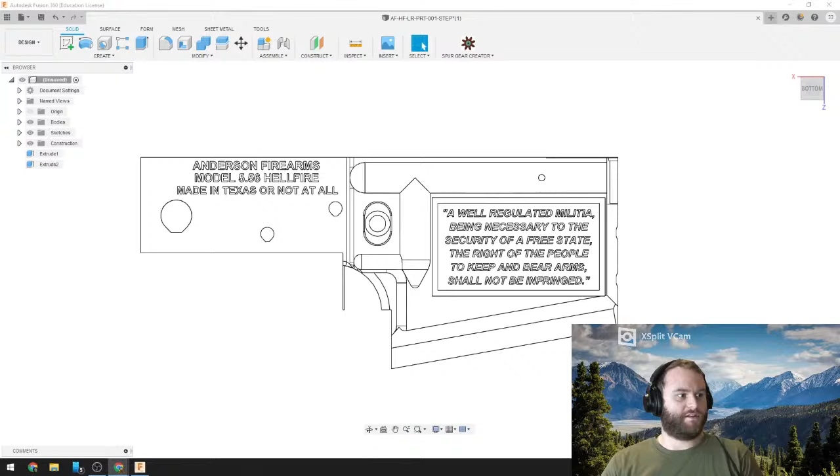Hopefully you can hear me now. Like I said before, or just said, this is my first time doing this. Thank you very much. Thank you.

A few people have been asking me how I edited the text on a certain 3D printing project that I did a little bit ago. And so, we're going to learn how to do that right now, all of us together. This is just an object that I found online. So we're going to figure out how to get rid of this text. There's a couple different ways to do it. So we're going to kind of go through what you would do for this model.

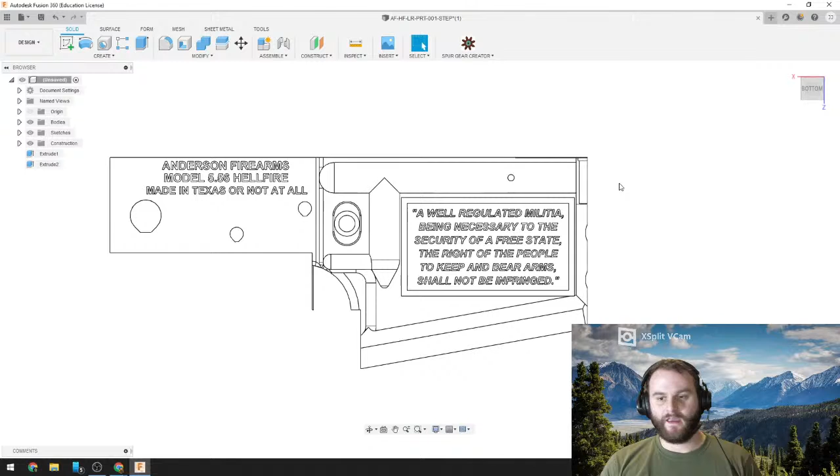We've got it loaded up into Fusion 360. It came up automatically in inches. That's totally fine. So this right here, I don't know about you, but I hate it. We got a few different options. We can see that this is raised up. The letterings are raised down. So, one thing that we could do is we can come in here, we could raise each lettering up, then we can raise this down. I think that's a waste of time.

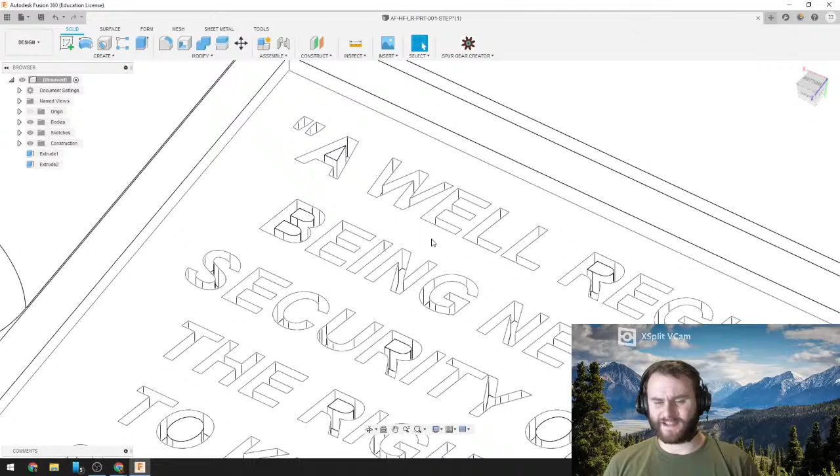We're going to make a box around everything. This raised bit, we're going to crank it all the way down to just delete everything and then raise it back up. So how are we going to do that? Well, it's honestly not that hard. We've got this outline right here. First, we kind of want to see how far we want to go down.

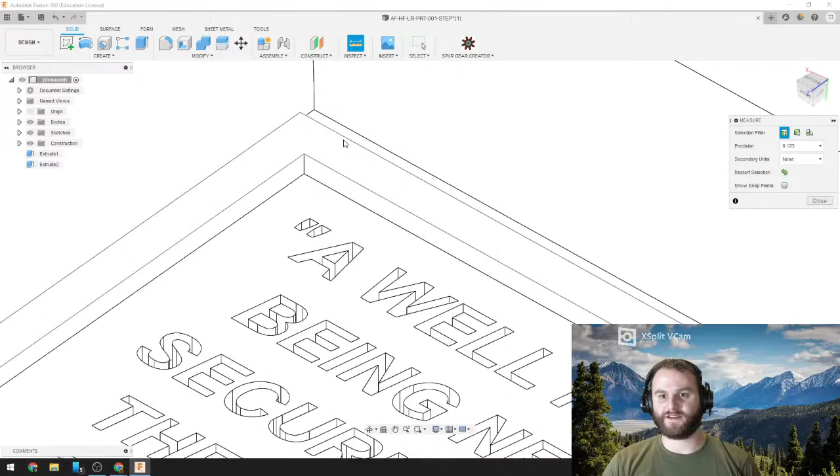So I can use this inspect tool and I can see how long this line is, 0.038. And I can see how long this line is, 0.05. So our square is 0.038. Our text is 0.05 inches deep. We want to remember that because some guy named Anderson or Potato Society or something decided on that and it was very important. So we want to respect that and we want to keep it.

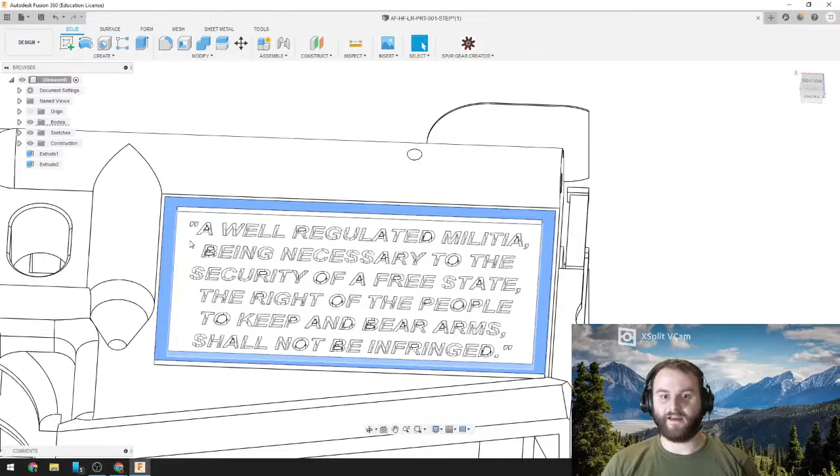So what we want to do is we want to select this thing right here, this whole outside, because this is the plane on which we're going to start our extrusion. Once we've selected that, we want to select create a sketch. And we're going to create a sketch on this plane. Now, we're upside down, that's totally fine. We can come up here and we get our square tool, make a square over everything, and finish that sketch.

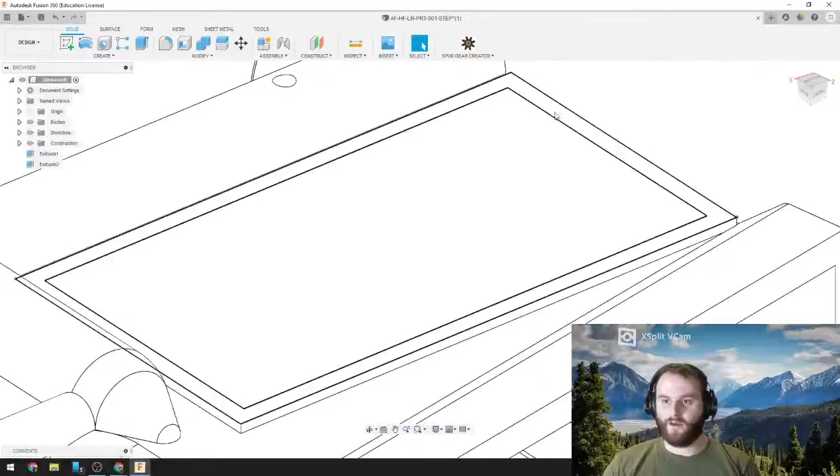So now we can hit this outside, and it's kind of trying to be smart and be like, hey, do you really want this inside portion too? Well, yes. So we can hold shift, we can do that inside portion too. And now we want to extrude everything down, and that's going to erase that text that we don't want. So we can hit extrude. It's going to ask us what direction. We want to go negative, right? So the cool thing about Fusion is we can go negative

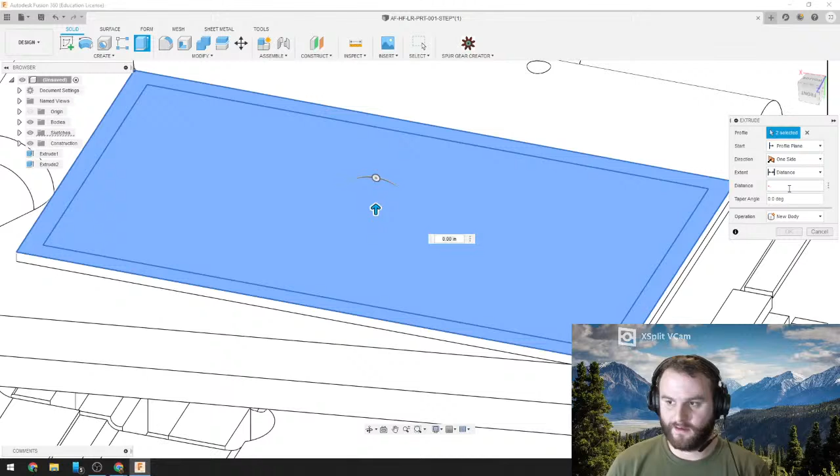0.038. And what we can do is we can add to that. We want to subtract our 0.05. And that's going to take all the way down that ledge, all the way down to the text. We want to make sure we're at cut, and we can hit OK. And then bada bing, bada boom, our text is gone. We have this big square, but this is the easiest thing to get rid of.

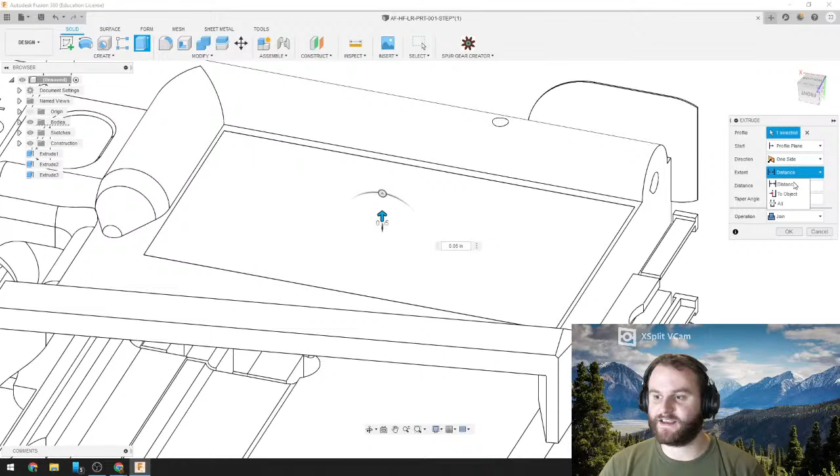We can click inside this square. We want to extrude, and this time we're going to extrude up. We got two options. We can either go distance 0.05, because remember, that's how far down we cut. Or another thing we can do is we can change this extent distance. We can change that to object, and we can click what we want it in line with. We can click it in line with that. It's going to raise it way up. We want it in line with this plane right here. Hit OK. And then we've gotten rid of the text.

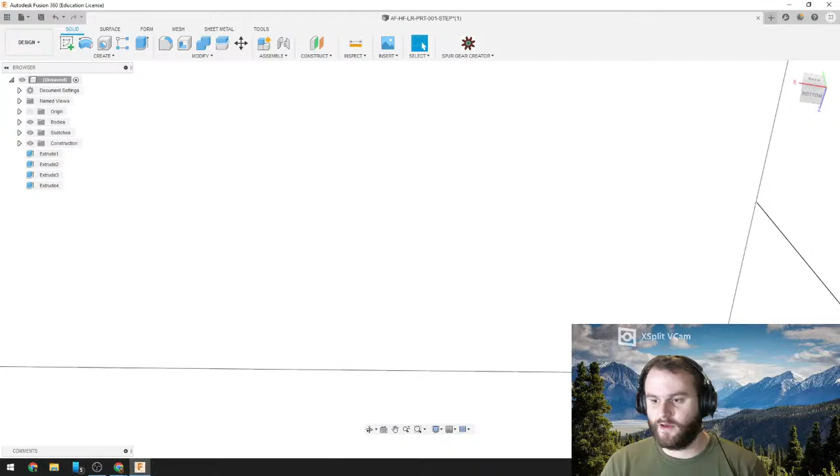It's completely plain. Some downsides to doing this method are we have a little nick right here. If we really wanted to, we could fix that. I don't care, so we're not going to do anything like that at all. The other method some people might do is they might come in here and click in here and hold shift and do a couple, and then they'll extrude it up to the object. That can be done too, but it's tedious.

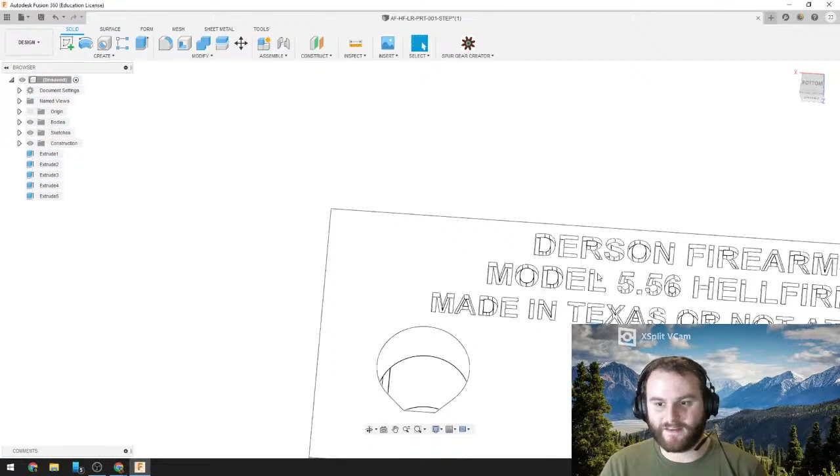It's boring. Who wants to do that? Is any of this making sense? If anything's not making sense, please let me know in the chat. We'll go back, we'll look at it. That's totally fine. But the next thing we want to talk about is how do we add our own text?

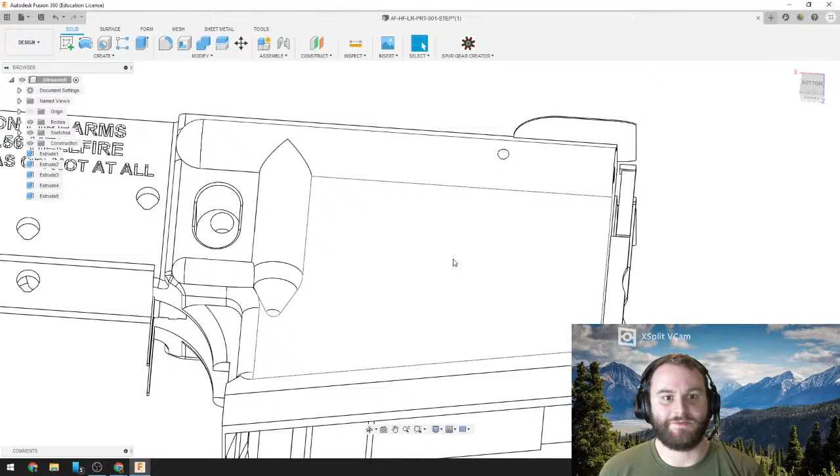Well, let's say we want this to be, let's throw the name cheap shot in here, right? So we can click this surface. Once again, this is the surface that we want to do everything on. We'll see about that. We're going to get through this first. So we want to go here. We want to create a sketch.

How did I get these black and white lines? So this is a personal preference. Let me close out of this sketch real quick. I don't know why these buttons aren't working. But you can click this button right down here, and you can change the preference, whether you want to view it shaded, or whether you want to view it as a wireframe or something like this. So this is just how I prefer to view my things.

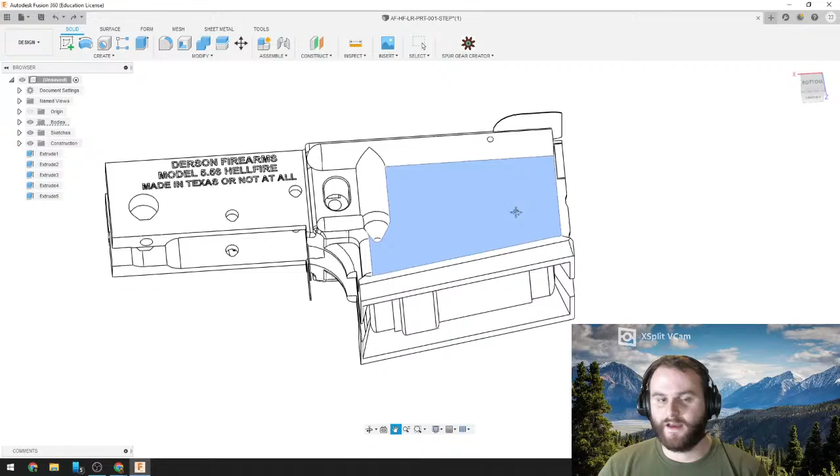So we want to hit this plane. This is where we're creating our sketch from. If you don't like working upside down, we can flip it around. That's totally fine. And we want to make it say cheap shot. So we're going to go create, text, easy peasy lemon squeezy. Where do we want the text? We want it right here.

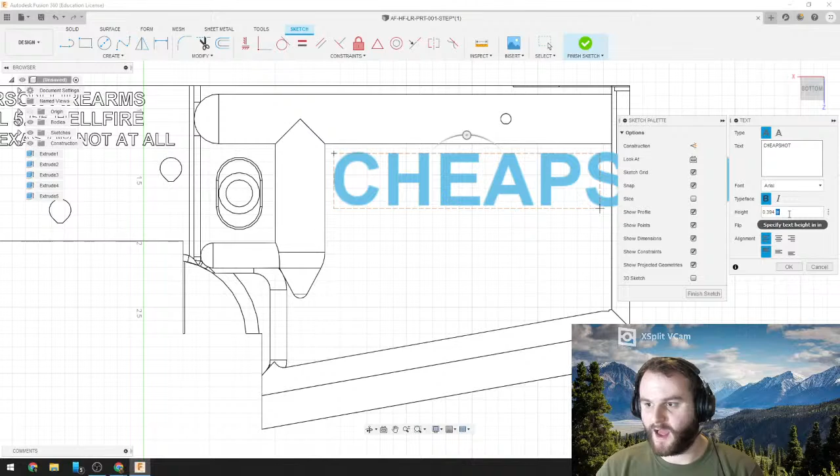Cheap shot. We can make it bold. We can change the font. We can do all that stuff. But I'm perfectly fine with what we're doing. So let's make it 1/5 of an inch. And we can slide it around and whatnot right there. So cool, we got the cheap shot.

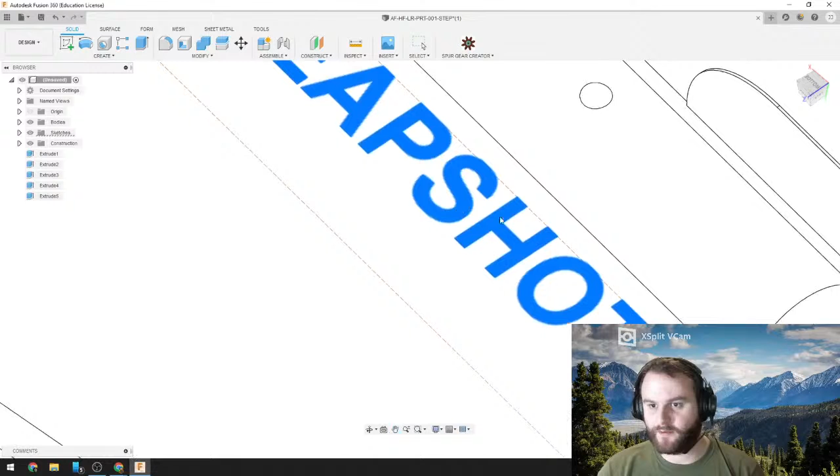And we want to extrude that down. It's super simple. We can just click on our cheap shot logo. We can extrude it down. And we want to go -0.05. Boom, we've got our own text in there. Now if you want to do it on that side, if you want to change your selection, make it say something funny, that's totally fine. That's what you can do.

Now another thing is let's add a picture. This is the fun part, right? We want to make this stuff our own. What picture are we going to do? Let's give it an eagle. So we want it to be nice and high resolution, and that's mostly because we're going to convert it to a file that Fusion 360 can work with easily. I did an eagle earlier, so I'm just going to keep using that one. Or you can use a vector, that's fine.

But once you find one that you like, you want to right click on it, save it wherever you want. And then you want to use a converter. So this is a JPEG to SVG converter. This is what I use for everything. We want to choose our file, and I'm going to use the one that I downloaded earlier. Oh, of course, it's not easily accessible. Sorry, I just got to find where I saved the other one. Whatever. We'll use that one. And it's going to convert it to SVG, start our conversion. And then we'll download it. I won't download it because I want to use my old one.

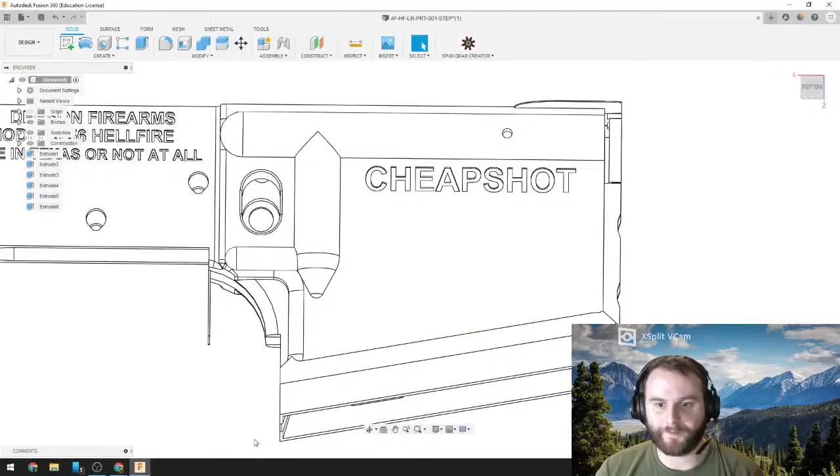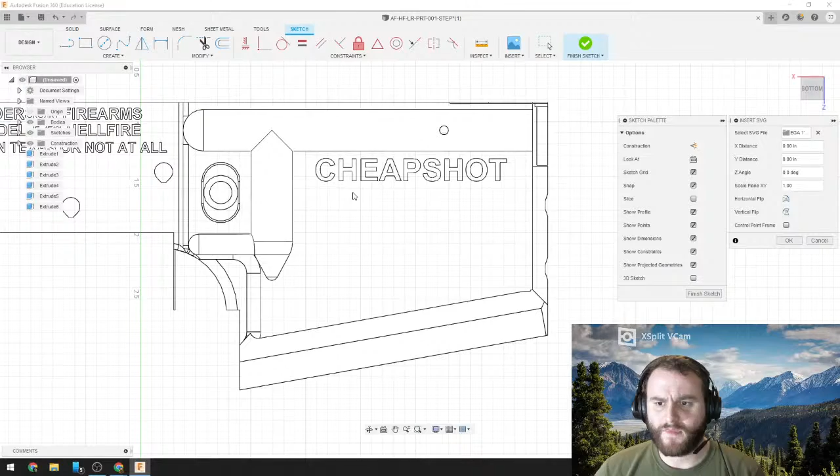So how do we put that into our print? Well, we want to click the same surface that we want to work on. Are you noticing a trend? We want to create a sketch. Let's just flip it around so we can see it a little bit better. And we want to insert an SVG. This is where we can put that SVG that we just downloaded. So you click on it, you can't find it, zoom out a little bit, she's over here, right?

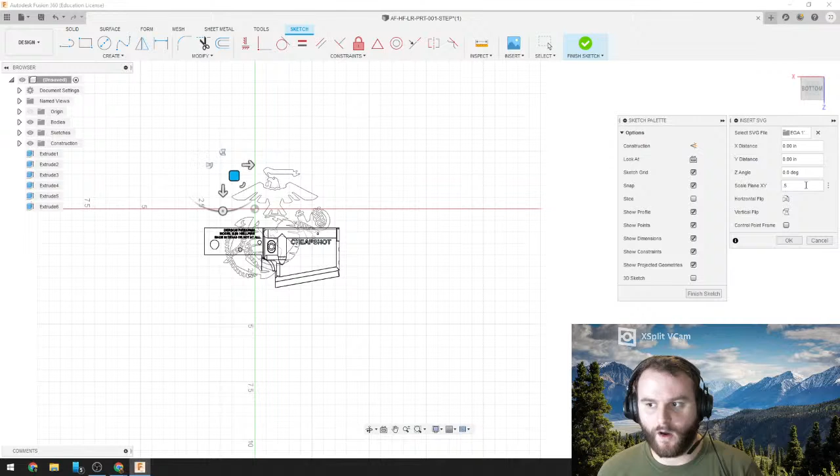We can zoom it around, flip it around. We want to scale it a little bit, it's too big, so I can come over here, I can scale, let's say 0.5. One thing to remember is if I type in 0.5 and then I move it, it technically goes back to 1. So if I want to move it again and cut it in half again, I've got to do 0.5 again.

So zooming in, we'll just move it and get it a little smaller. Keep in mind I moved it, I can't do 0.5 again or it's going to get super small. So if I did that, we'd get super small, so I want to go something like 0.9. You know what? That works.

So if I like that positioning, I can finish my sketch. It's going to take a little bit for Fusion. Sometimes these lines kind of make it complicated. And then we can come in and we got that image right there, nice and perfect.

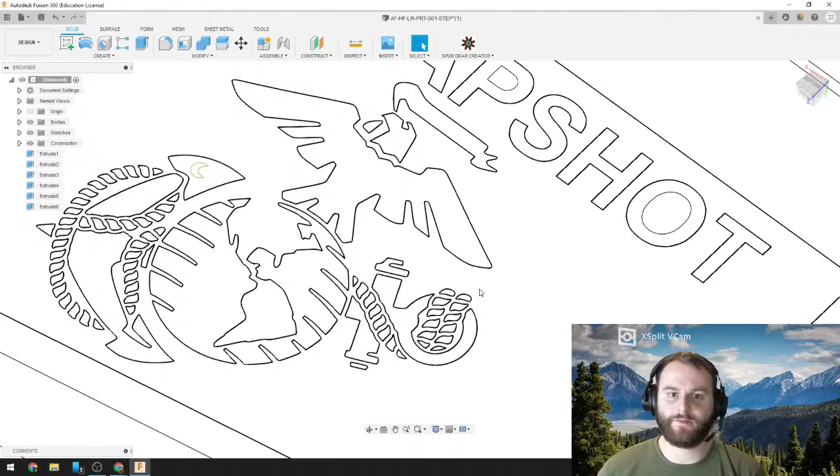So we want to inlay that in. We can either put it out or inlay it in. Inlay it in is the preferred method. So just like we did everything else, we're going to hit extrude and we're just going to click in the center of all these different things that we want to extrude in.

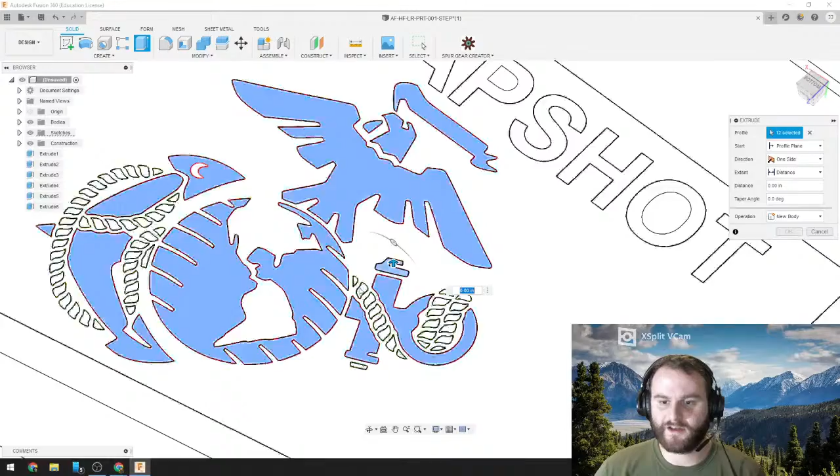Now this is going to take me quite a while. I should have done something a little bit quicker. We'll do everything but the rope. I think y'all know what this looks like.

One thing to notice is this will be fine with the rope, but if you're doing things with lots of fine detail, you're gonna have issues with that fine detail coming out when you actually print it. So just keep that in mind when you're looking for an image. You want a high resolution, and you want to make sure that you're not going too deep in the details.

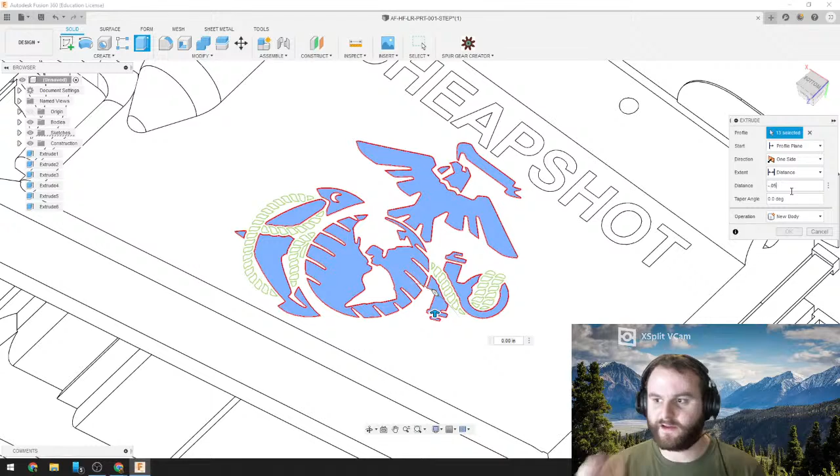Distance, what are we going to do? You guessed it, negative 0.05. And then we hit OK. Fusion might take a second, lots of complex geometry, and then boom, we're done. We got our own image in line with the item.

It's not anything more complicated than that, and then you can do whatever you want with it. This will work with any type of file that you have, as long as you can bring it into Fusion 360 and it's a part file or a step file. It'll be easy peasy lemon squeezy.

Are there other ways to do this? Yes, there are other ways to do this. You could actually look through the progression of how whoever made your file actually made it, and you can step back or suppress certain features. That doesn't always work because that may not be provided for you, but this way will work. So easy peasy lemon squeezy.

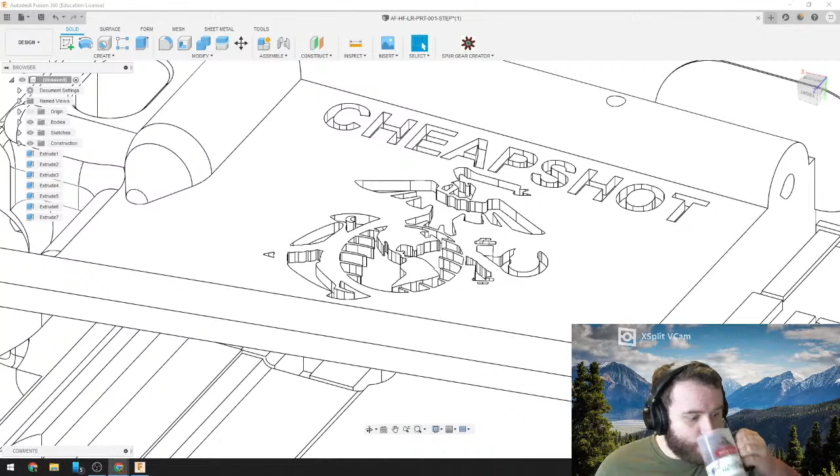All right, what else do you guys want to know how to do? Just simple things with Fusion. Let me know in the stream chat.

What is this? Could you do the FGC 9 lower with the J Stark watermark so I can see everything from the beginning? I want to be careful with the files that I use, just because of YouTube. So I don't think I'll do that exactly, but it's the same process, you know, just get that SVG, insert it, extrude it down. It's no different, no matter what you're doing. Even if you were to just make a random part right now by yourself, it would be the same exact process. So if anyone else has anything with Fusion, I'd be more than happy to answer that.

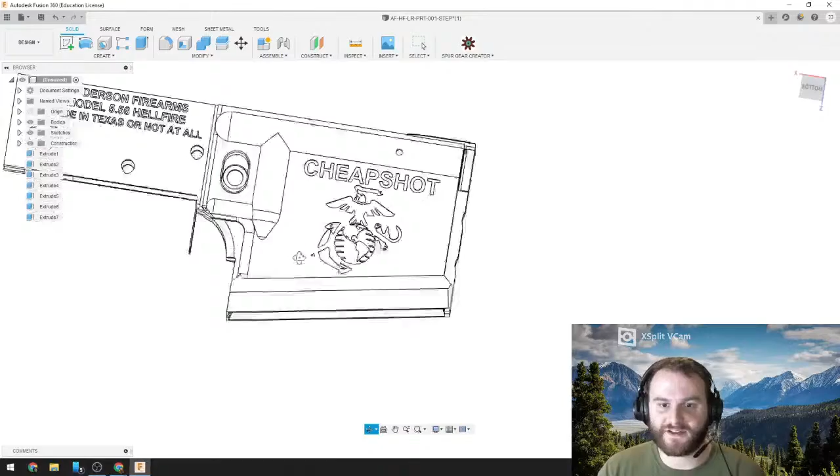One thing that I did is I used some squares to kind of extrude out just to make this a little bit different. So let's see what else we can do.

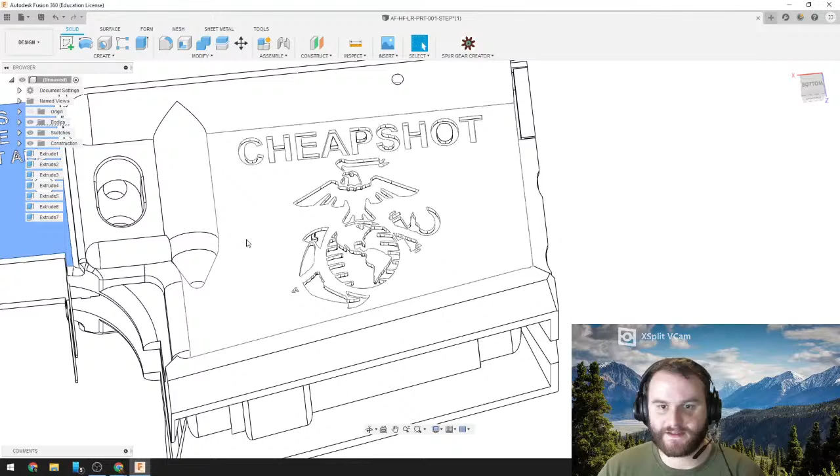Let's say like this edge right here, right? You don't like that it's sharp. This is a top edge, so you don't want to use a fillet because 3D printers will have a hard time getting that rounded surface on the top of your print. Remember, this print's like this. So if you kind of want it a little bit less sharp, you could use a chamfer. You can just click on that line, and then you could bring it down and kind of make it a slant. It's not going to work because of other reasons.

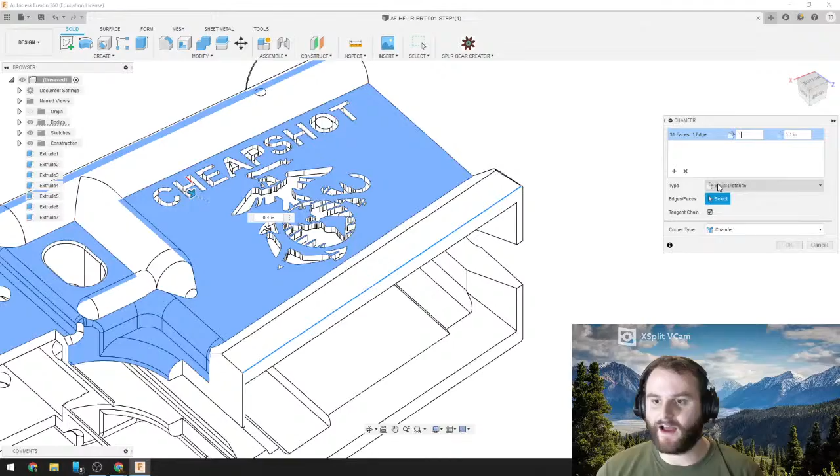What about this token on the other side? I don't know about you, I really don't like... I'm very new to Fusion, but I know Blender a bit. How do I select individual letters? Just select them, man. Just select them just like this, just in there. Extrude it, pull it out, right? Distance to object. That slice. And she's gone.

So let's see how to get rid of this token. I personally don't like the whole token thing, but I didn't design it, so I don't have too much room to talk. You can do a circle.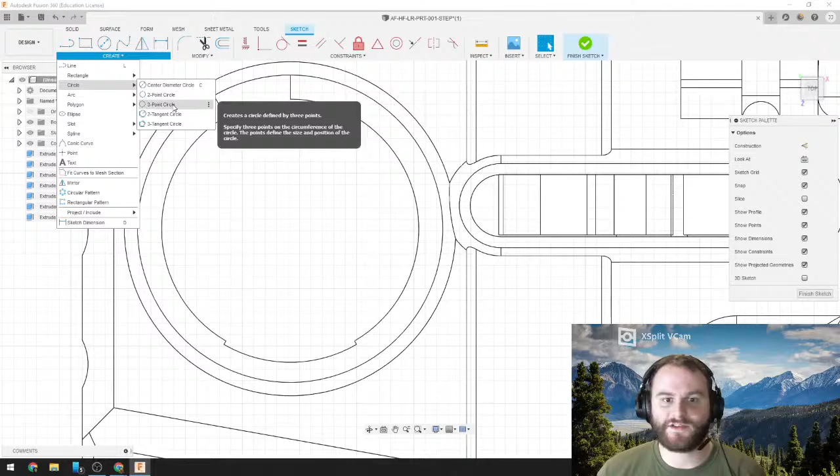We'll just do a 3-point circle. It won't lock onto this, but you can do a 3-point circle right above it on top. We can come down and just do it pretty close. Then it's going to ask us how we want our third point. We just want it right out there. That makes a circle around it.

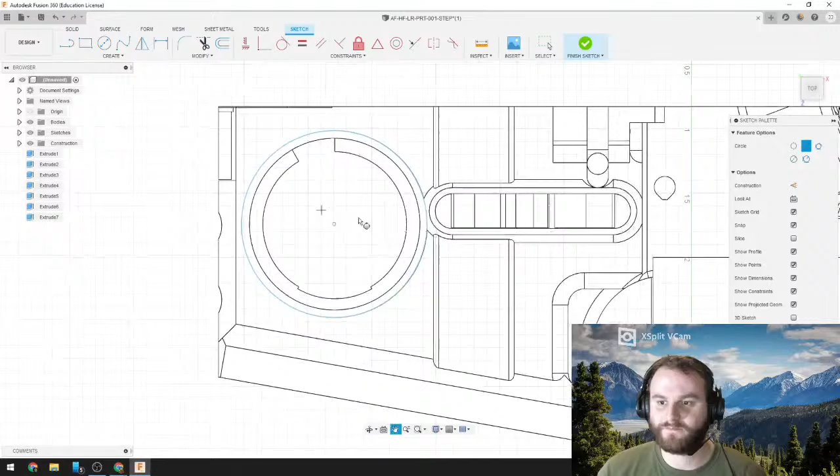We can finish our sketch. Just like before, we can click in the middle, hold Shift, to get everything. We're going to extrude it down to object, this plane right here. Hit OK. And we've cut the token away.

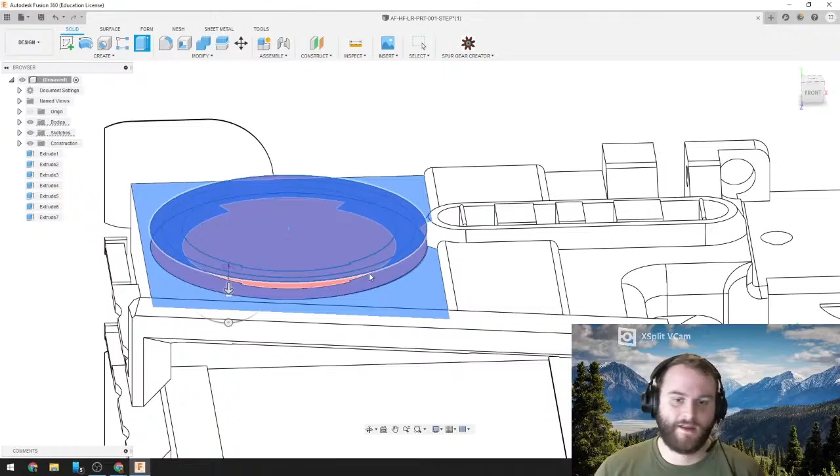Well, for the most part, it looks like it's inlaid a little bit. No problem, because I can click inside and extrude it up. Done. There's this little line right here. That must have just been an issue with my 3-point circle. Wasn't the best way of doing that.

So I can click that, extrude it. Oh, just make the circle better. You can get that. Fixing that, I don't really care about it. It's not worth it.

Mine does not do that, it just selects the whole blob of stuff. Maybe it's because I put the STL file into Fusion. Yes, it's because you put the STL file into Fusion. Use the step file, right?

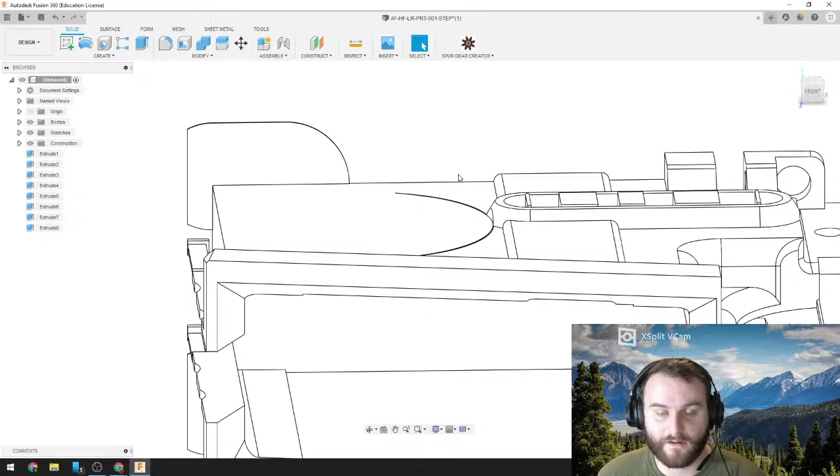So what is she asking about? Well, if I come over here and I want to open a file, I come to where I got all this stuff loaded. Let's say I'm doing the Anderson Hellfire. If I do the STL, it's gonna come out looking like this.

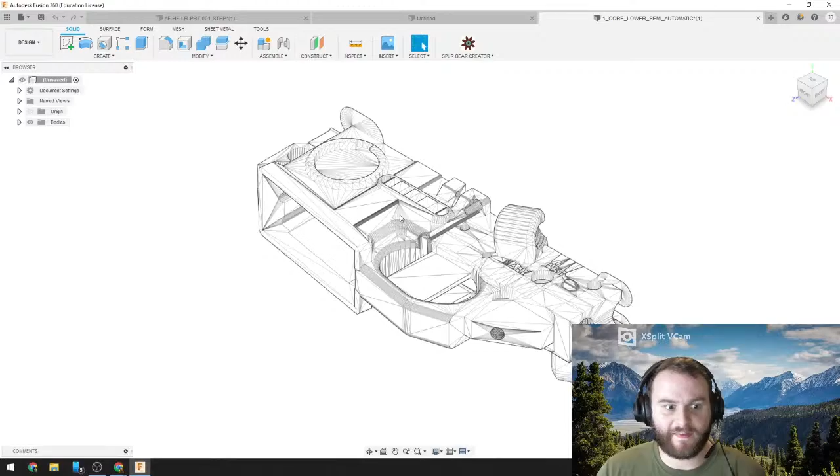Jesse, is this what it looks like? I'm sure this is what it means to look like. You don't want this. We want to use the part files, or I'm sorry, not the part files, we want to use the step files. So not STL, step files. What else has anyone got?

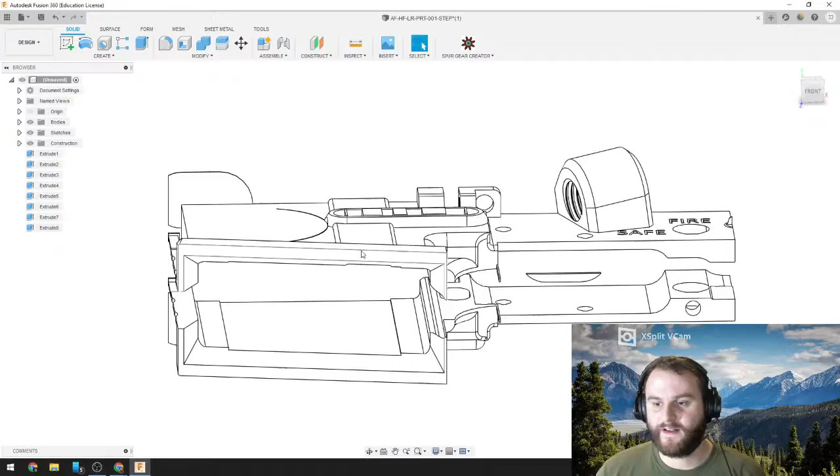Let's take this and let's pretend, yep, that's what it looks like. So Jesse, you want to make sure you do the step file. Let's take this and actually load it into a slicer to see what it looks like. So we're gonna hit save that as an STL, and we'll save it up here, and we'll call it a stream.

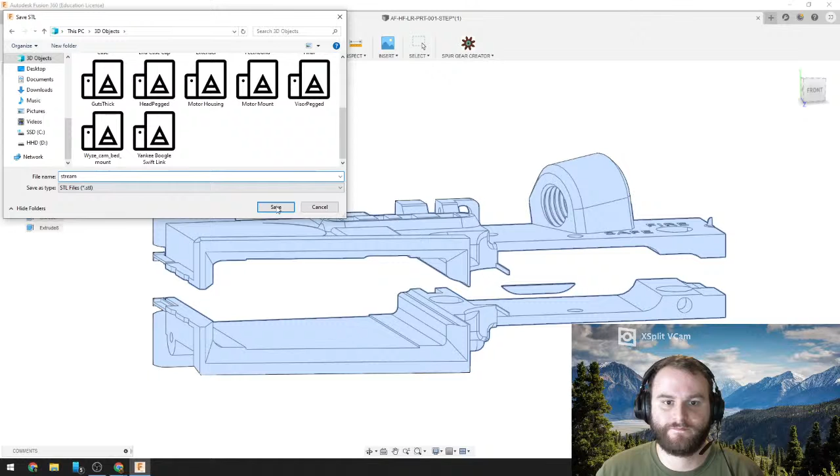We'll open up Cura and take a look at this. So we've got Cura right here. You should have your slicer profiles all set up. We're going to click on this. What did we name it? We named it Stream, didn't we?

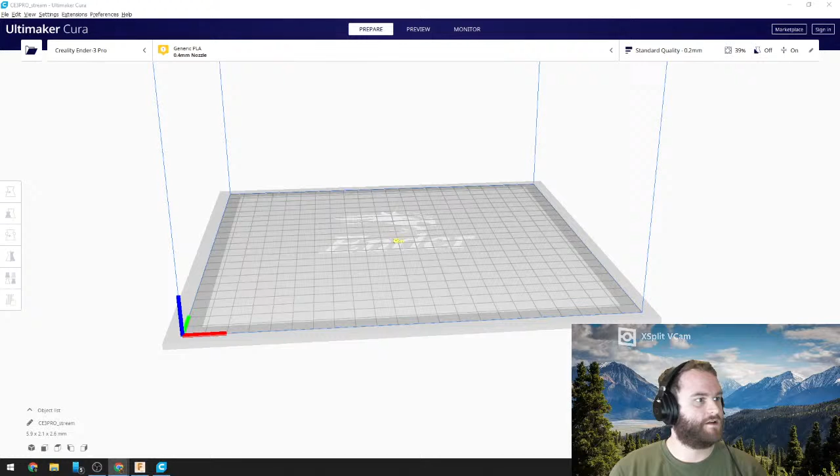Oh no, it's so tiny. And that is because it's in inches and Cura loaded it in millimeters. So I don't remember what, 254 I think. We're going to click on this and we want to scale it. I think 2540. There we go. And there we go. Now we put it from inches to millimeters.

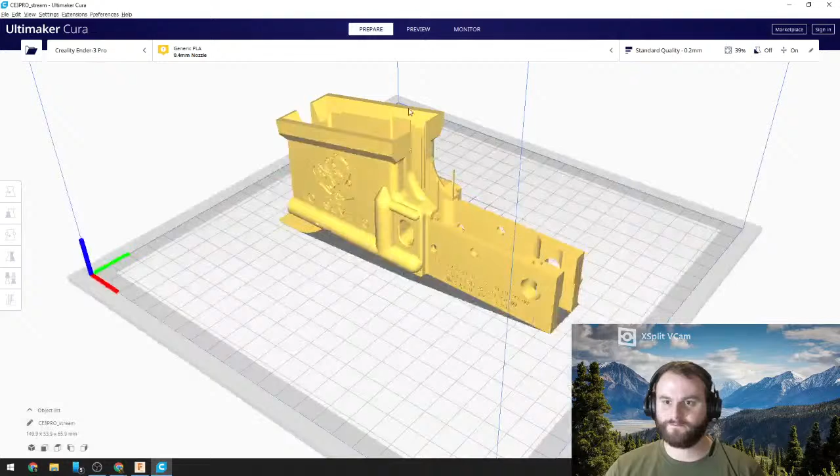So one thing to remember is we get our strength from layer lines, not from infill. So you still want to have a good amount of infill on this, just because you want it to have a little bit of mass, but you also want to have good layer lines.

I believe it says something like 5 wall count, 4 wall count. When I printed this, I did 5 walls, 5 top layers, 5 bottom layers. I think I did 90 to 95% infill. I don't ever do 100% infill, I just hate it. I think you're gonna mess up too much. You might have an issue. Like I said, 90, 95 will do it for you.

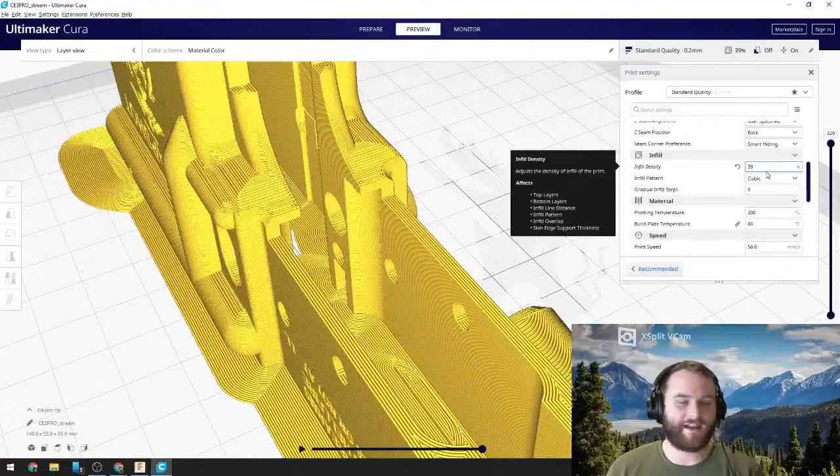But one thing you want to check is you want to look down your print and look at these walls. This isn't, you don't need to worry about this. But if you come up where, let's say, this is a good wall section, that is going to be a long, continuous wall that needs strength, right? So if we have a gap between these two...

Number one, it's gonna be weaker. We have a gap between those two walls to compress. But then number two, it's gonna spend so much time doing those wall layers and then coming back and filling in the little infill bits. We don't want to do that. So I'll show you what I mean. If I put my wall count to 1, it's not gonna be enough for that area.

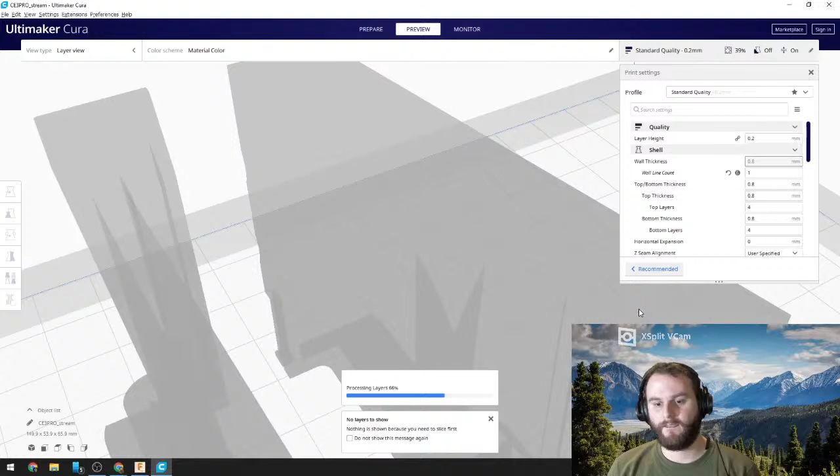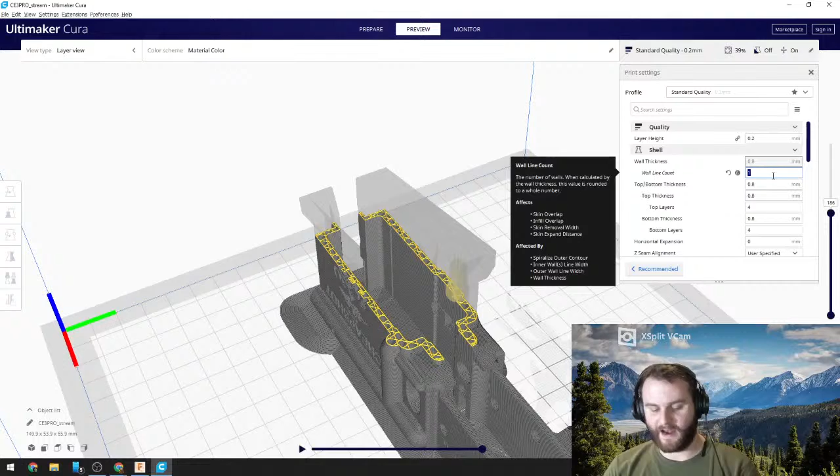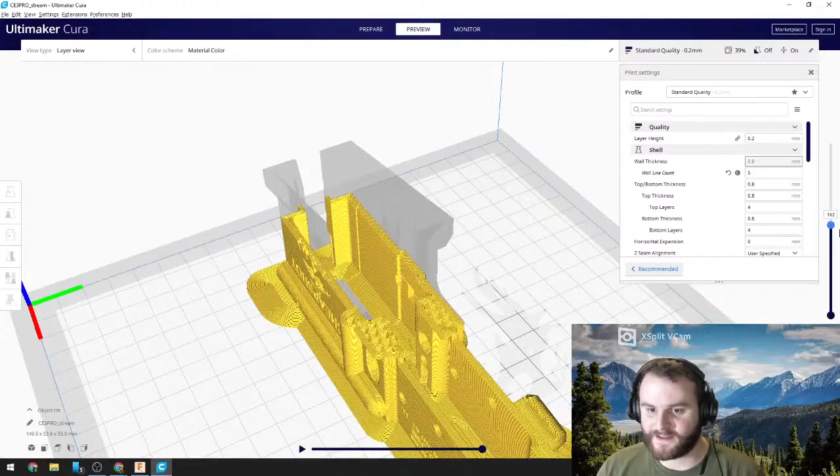All right, it adds 2 hours. But I tell you what, because you got other spots down here where it's doing all that infill down there and whatnot. But just make sure your walls look good. Take the time to come in here and inspect how it's going to be going, all right? Remember, your strength comes from your walls, not from your infill, right? This one did great for me with no support or no adhesion type.

Get yourself a deburring tool. That's great for just running down prints, just kind of cleaning it up a little bit.

Wouldn't a lower percentage be less strong? Sorry, I didn't see that. Like I said, your strength comes from your walls, not from your infill. Still do like a 90 for this, you know, just in case, just for a little bit of mass, but the majority of your strength comes from those walls, not the infill.

So, any other questions, throw it in the chat. And, you know, you want me to make a part, you want me to do something else with this, do a different image, show it all again, let me know. So we'll kind of chill for a few minutes and see what you guys think.

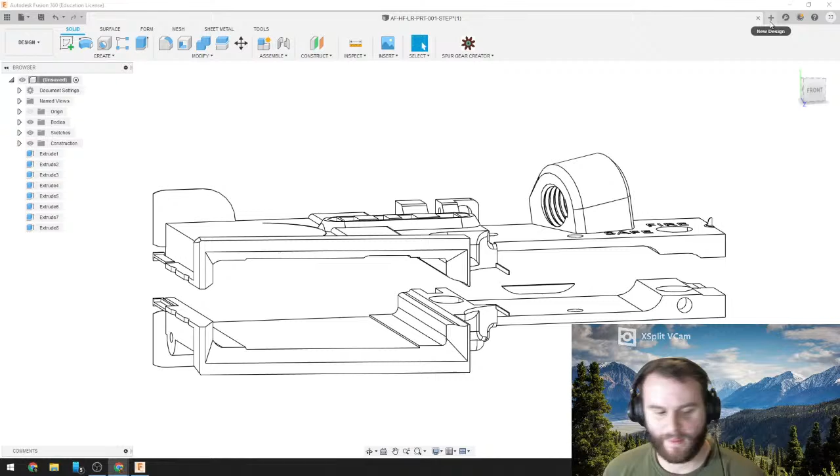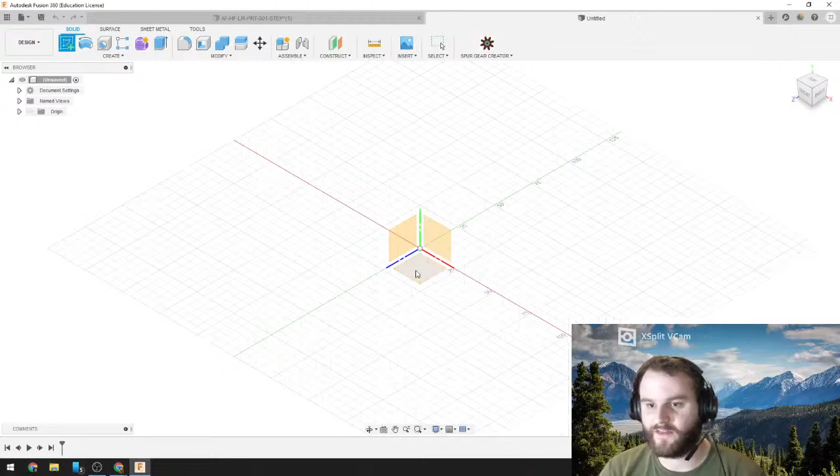I don't know, what should we make? What do I got around me? I don't know, let's just make something. Let's make a calculator, right? So if we're starting off with nothing, right? And we want to click on sketch, and then we got a few different things we can make. We have these 3 planes and then these 3 axes, right?

Oh, I know. So I just made this little motor mount, right? And you know, it's because I'm going to make my own 3D printed tumbler. So this is kind of fun. This is going to be the next video. We'll show you how I made this motor mount.

So I want to work on this plane right here. Why? Who knows? This is a center point. Let's try and keep using the center point because it is going to have an axis running through it, which we're going to use later, especially if we're going to be making these circular parts. So this is just like before where I was working on that layer of the part, except now I'm working on a plane. I don't have anything to work with, so we're going to make it.

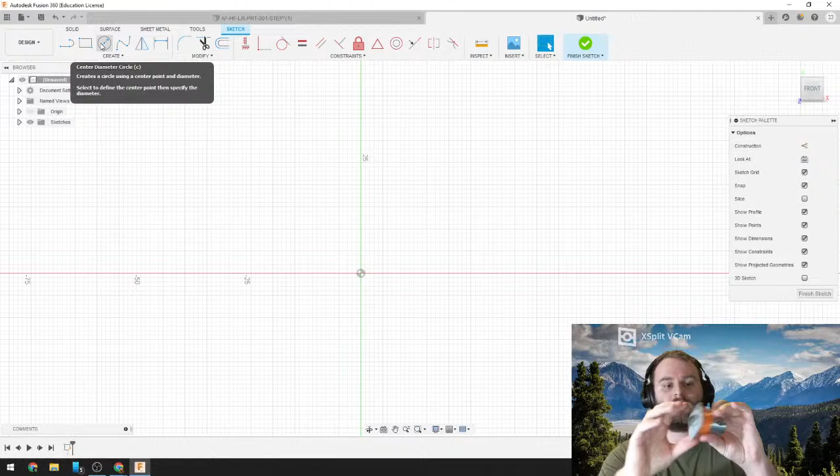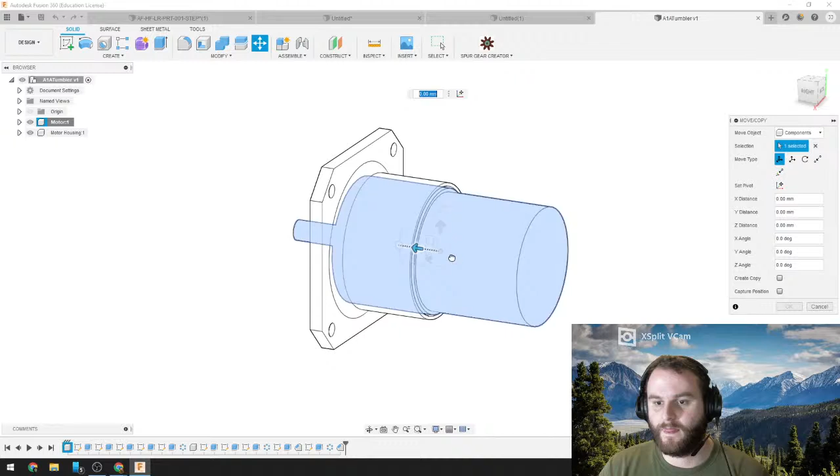So what's the first thing for this motor mount? Well, I kind of got this part coming out, you know, so I actually will open the one that I made just so we can see. So here's the one that I actually made. We have a motor and the motor mount, right? So the first thing that I wanted to do with this is I wanted to make the motor. So I guess we'll do that. I guess we'll make the motor.

And I'm going to take and I'm going to measure the motor, and it's going to be 50 millimeters wide, 50 millimeters in diameter. And I'm going to hit my sketch, and I just got this circle just floating into space, and I need to make it a cylinder. So I want to click on it, and I want to extrude it out. Just, you know, think of any shape.

You know, I remember when I was younger, we were in the Cub Scouts, and we had a bar of soap, and you had to whittle it into something. And I was going to whittle it into a bear. And I asked my dad, how do I turn this bar of soap into a bear? And he said, well, it's easy. Just take the bar of soap and cut away anything that doesn't look like a bear. And I thought he was a jerk. But you know what? He was right. This is just the same thing in reverse.

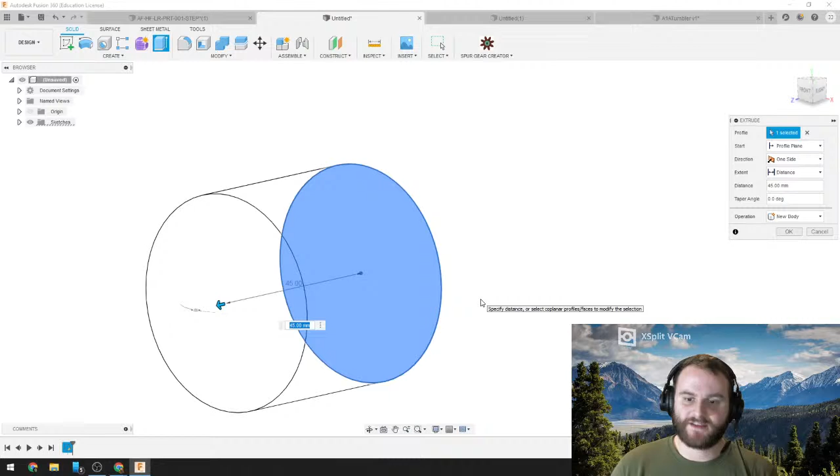So let's say it's 45 millimeters out, 50 millimeters wide. This is our motor, right? We come in here in the center. We still got that spindle. Let's say we give it a spindle that's going to be 10 millimeters. And we'll extrude it out 10. We're just kind of throwing things out here, just kind of seeing how it does.

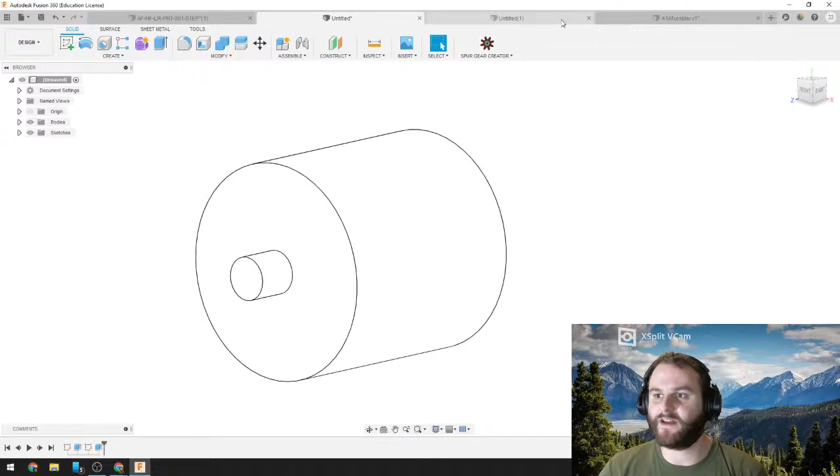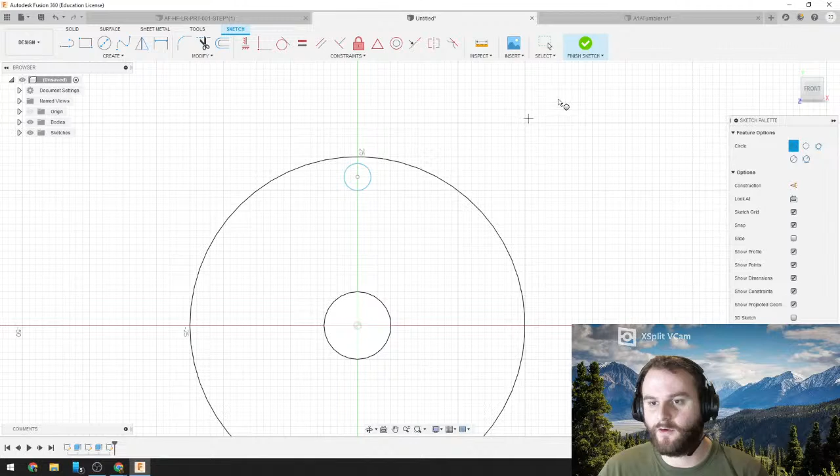If we look at this, you see that I have holes for where it threads in, and that came with the motor. So how do we make those holes? It's great. We're going to go on the surface. We're going to put our holes. We'll measure it. Well, we want to use this circle, 2-point circle. Let's say those are our holes. Hit OK. Those are 16 millimeters deep.

But how do we get them around? Do we go and we do those circles all the way around? That's kind of tedious. One thing that we can do is we can do what's called a revolve feature around an axis. So we want to come down here to create, and we have all these different things. We've just been using the sketch and extrude, but we have all these different things. And I really like that it kind of shows you what it does. But we want to come over here to the pattern tool, and we want to do a circular pattern, right?

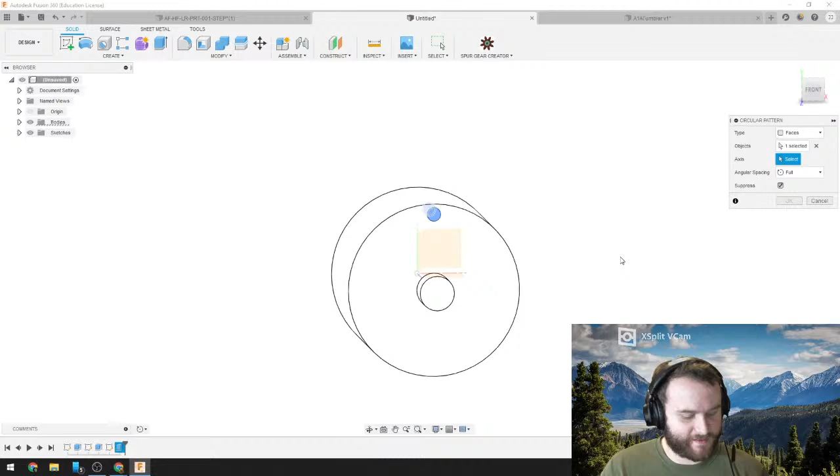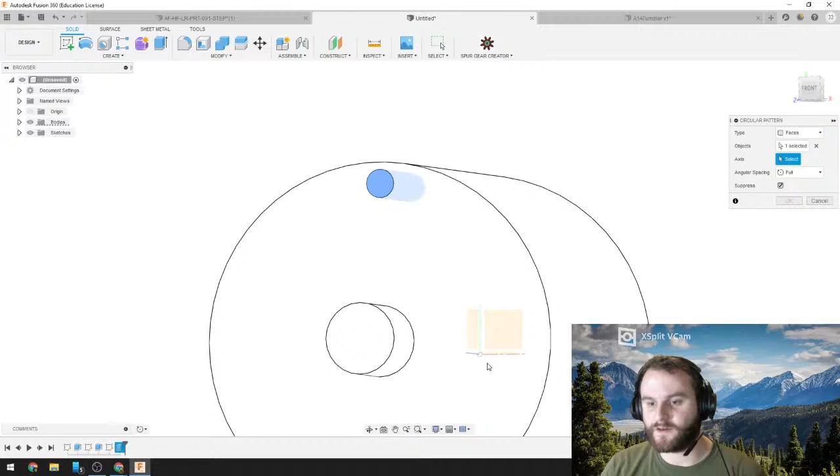So it popped open. What object do we want to do? We got to select that. So we can select the hole down here. I just like selecting down here, that extrusion that I did. And then we need the axis. So we need to select that, and we need to tell it where around do we want to do our circle. Well, we want to do it around this center point right there. This center point also just happens to be the center point of this circle, so we can click this circle, or we can click that axis. Totally fine. If you click the circle, it's going to do the center point of the circle. But we'll click the axis. I'm sorry, I keep saying axis.

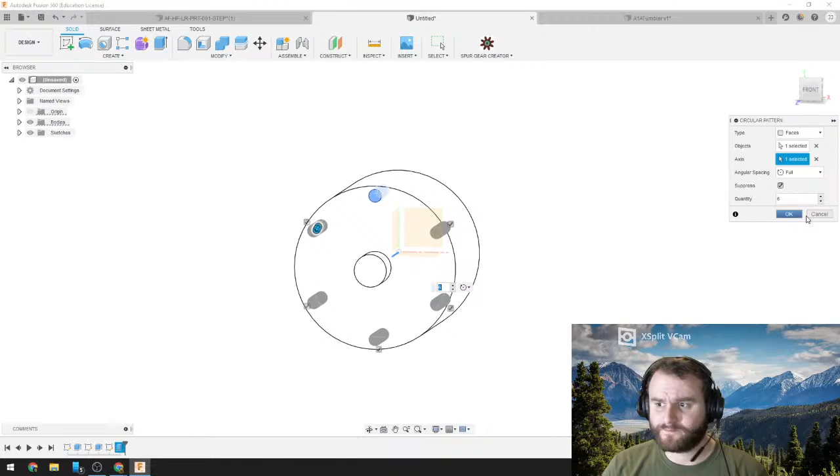Axis. We got 3. We can kind of change how many we want. If we want 1,000,000, if we want a lot, whether or not we want them equal distance, whether or not we want them a certain angle. We'll say that we want 6 of them. We hit OK. Boom. We got them. 6 equal circles around that axis, which is exactly what we needed for our holes. It was perfectly fine. So that's a pretty cool one.

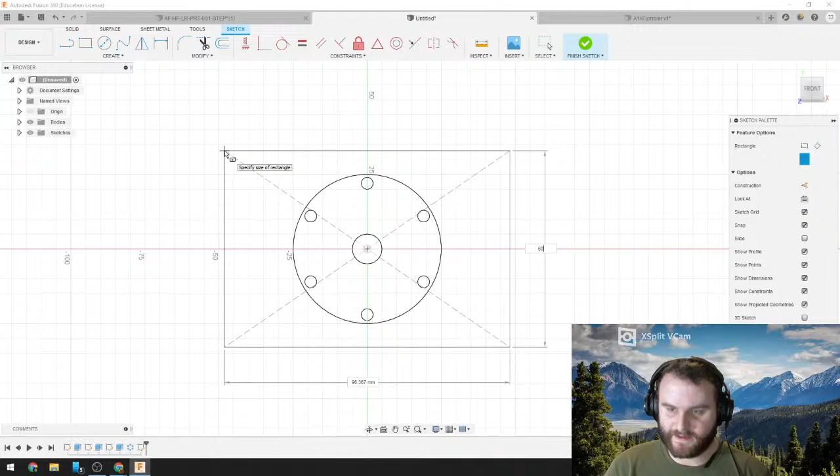You could also do things where, so when I had made these holes right here, I didn't make a new part, but that's fine. So let's say I click on this face, and let's say I have like a mounting bracket with it, right? Let's say this is 60, this is 60. Finish that. Let's just say this mounting bracket was already attached to it. One thing that you can do is I can come up here, I can create a sketch, and I want some bigger holes up in the corner, right? Some main mounting ones.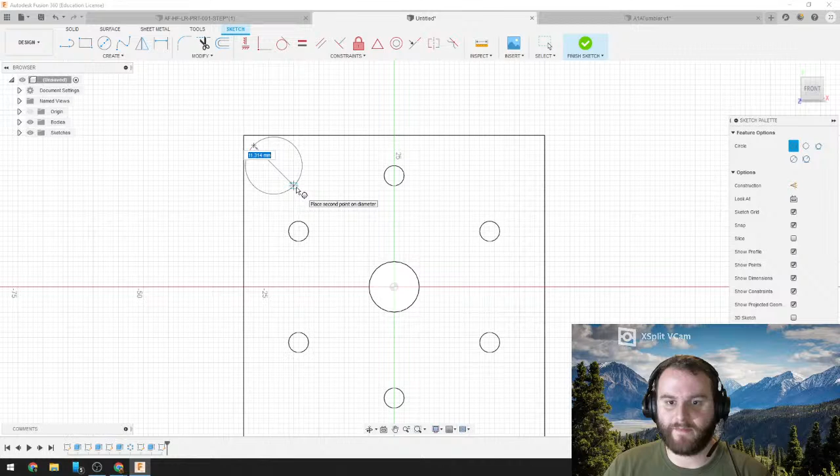I can extrude those out just like I did before. Remember, I can come to a distance, or I can hit to object. The to object is going to be better, because that way if I were to change the thickness of that plate, it's going to continue to go all the way through. If I just did it at a distance, let's say I just said 5, and then I change this thickness here to 6, well, it's only going to go 5. So if I do it to a face, if I change that face, it'll always change with it.

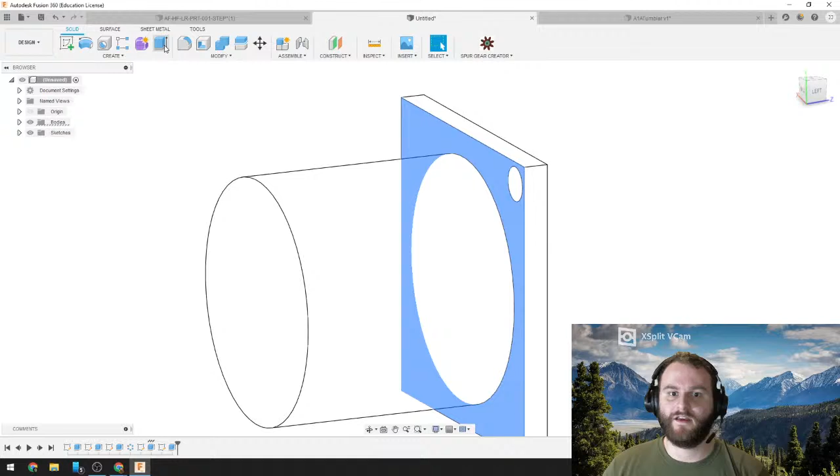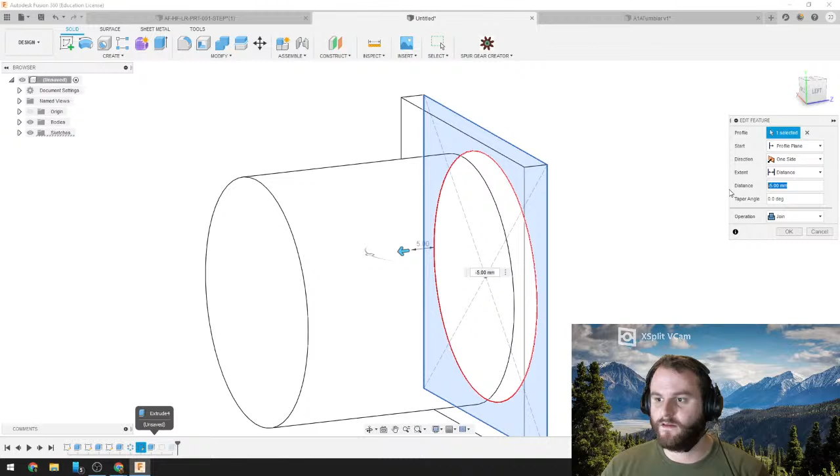So if I extrude this out, that circle comes with it. But if I had changed that to 5 and hit OK, well, it would still do it. And if I made this -10, the circle doesn't come with it.

So it's important to kind of set yourself up for success in case you need to come back and you need to fix something. So I have this in the corner. How do I get in the other corners? I can measure. That's dumb. Takes forever. Create. Same thing. Pattern tool. Rectangular pattern. What object do I want? This object right here. I can click on it.

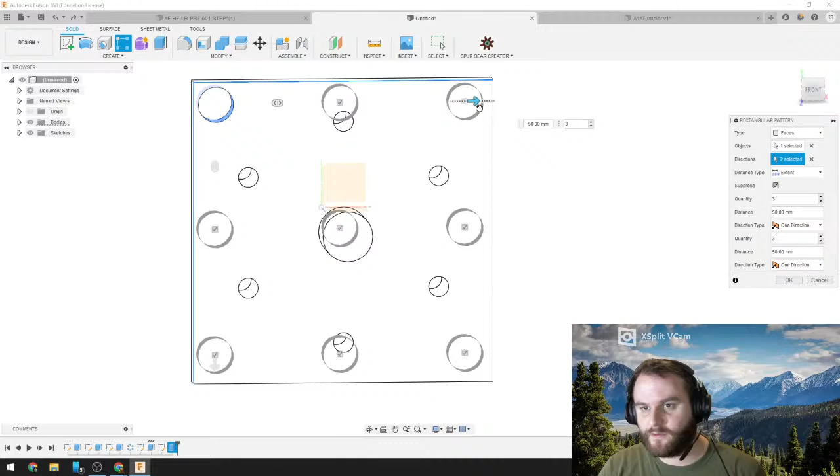The directions. I want it to go in one direction across the top, one direction across the bottom. I can just hit that plane and this line right here. And you can either use this or you can drag it. Oh, look, see how it made that beautiful rectangular pattern? We just went 3 in that direction, 3 in that direction.

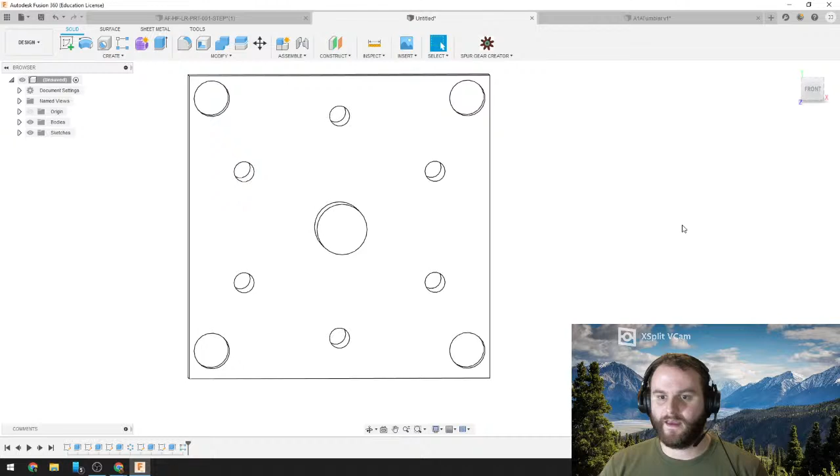You kind of have the different things to where you want to do it. You can either use some measurements, whatnot. You can kind of eyeball it. Fusion 360 is really good at snapping things together where they want to go. And you can hit OK. And then boom, I got my motor mounts on the outside. I got everything clipped in just like that.

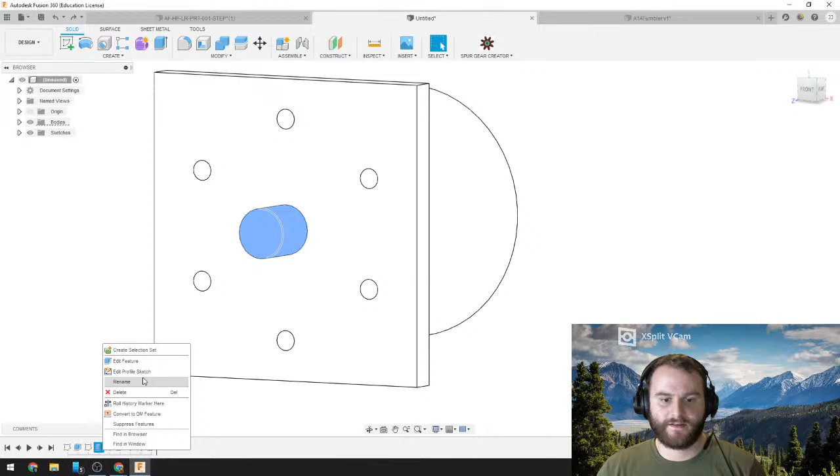Now, some things for your 3D printing. Let's Control Z this all the way out. Let's say I wanted to print this. We'll get rid of this. Let's say I was wanting to print just this part as it was. So what would be the best way to print this? Well, it'd probably be to put it face down, right? Because if I did it like this, I'm gonna have a lot of supports over here. So we want to go face down.

What are some things that we can do to make the part stronger? I love chamfers. I absolutely love them. I use them all the time. And it's going to be really great at making your walls a lot stronger because you're not at a 90-degree angle where just one layer is hooking onto another layer, and that's where your weak spot is. You kind of bring it up.

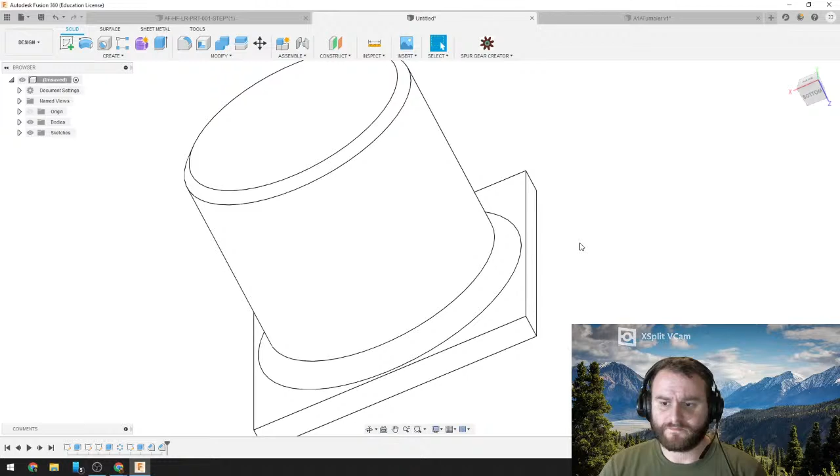So you can come over here to modify, and you can do a chamfer. I can click on anything. I click on this object right here, and I can do it to an amount, or I can slide it. And it'll kind of chamfer it a little bit. It'll warn me if it gets to like 0. As far as strength goes, I can do it down here, and I can kind of beef this up a little bit just to give it some more strength. I can also do that around the outside too.

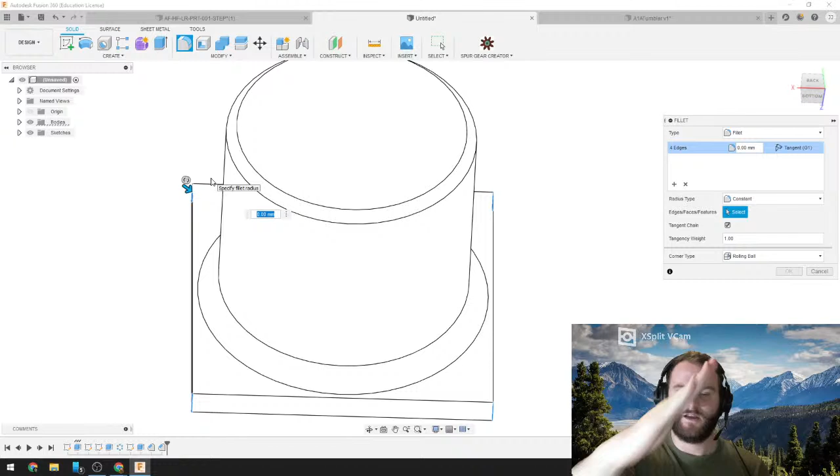Another thing you can do is a fillet. A fillet is the same thing as a chamfer, except it's round. That works most on these axes right here, where it's going up and down. It does not do well 3D printing like this. If I have it in the Z direction and it comes up, it doesn't do that very well. If you want it to be smooth right there, use a chamfer, don't use a fillet. But I can fillet in here, and I can kind of round it out a little bit, make it look pretty. And that really steps up your design game.

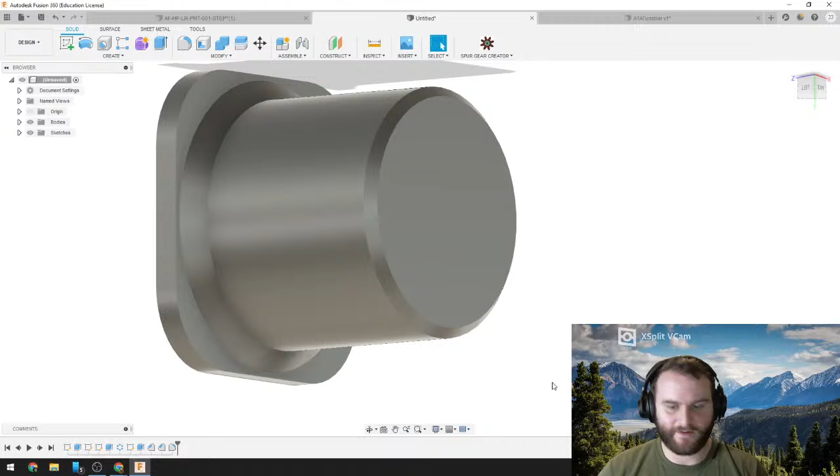Here's what we were talking about before, Jesse. You can come to visual styles. We have shaded. As you can see, I don't really like that. Most people go shaded with hidden edges. Most people stick with this right here. That's mostly what they design in. Wireframe. Hate wireframe. Absolutely hate it unless you need to see into something. Wireframe with hidden edges. Lately, I've just been doing wireframe with visible edges only. I think that's been working perfect for me.

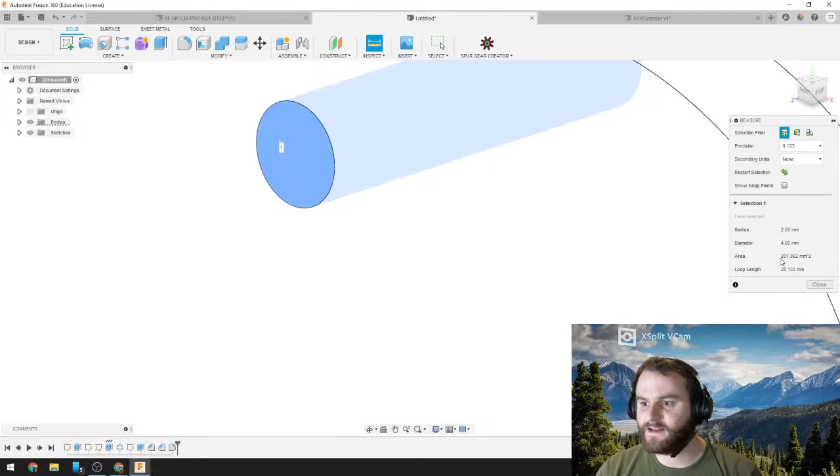So, all right, LC, did that kind of work for you? Well, you kind of want to talk about inspect. I can click this inspect feature, and if I click on this circle, it's going to tell me its diameter, its radius, right? If I click this object right here, it's going to tell me its area. But another thing I can do is I can hit inspect, and I can hit this line, and I can flip over here, and I can hit this line, and it'll tell me the distance between them. That's an interesting thing that you'll probably end up using a lot.

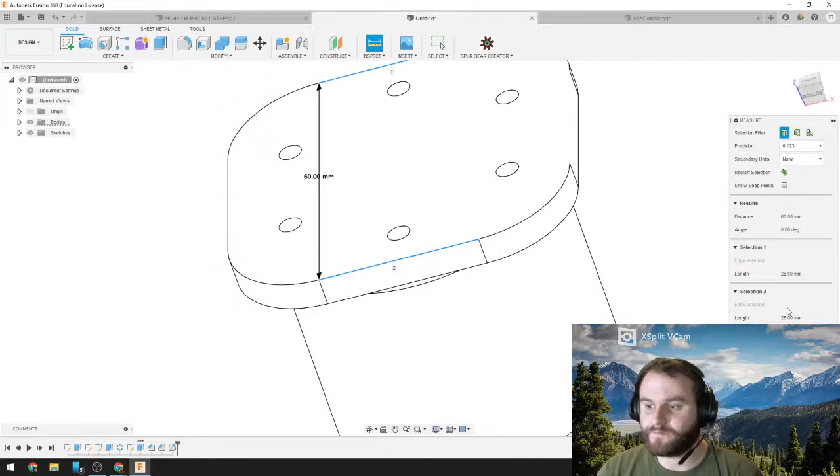So thanks, LC. Anything else anyone got?